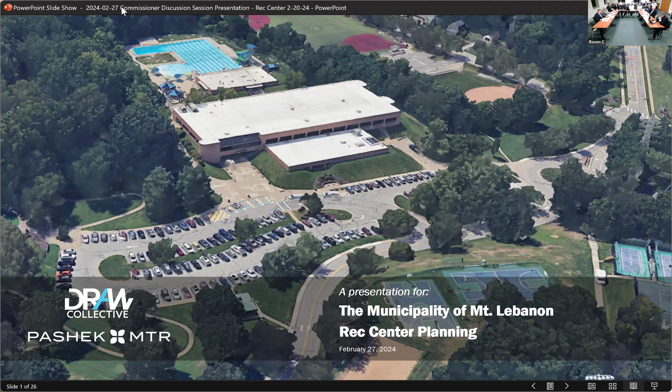So I think Ian kind of gave the overview. We want to go over the existing rec center building. We started by going through it, not a full assessment, but trying to understand what the needs were and what the challenges are at that building. We have a couple options for renovating the building, and an option for a new rec center in the park as one potential place to put it. Patrick will have additional information about what we can do on the site around that as we try to tie whatever we do with these buildings into the larger park. Okay, good.

So I'm sure we've all been to the existing rec center. When we pull up there, the building is very dark. It's hard to tell if the building is open. There is a lot of wayfinding confusion. But one of the largest problems with the rec center is that it's not accessible, so the pool is a challenge for folks to get to in the community.

As well as there are 2 entrances to this building: a hockey entrance on the lower level, and a separate entrance up the ramp to get to the second community level. But the building itself lacks any wayfinding. If you are a newbie coming to the rec center, it's hard to know really what level you should go to or where to drop your child off at summer, those sort of things.

So the first thing we did was meet with the staff and examine how the rec center currently functions and what improvements they would like to see in the facility. One of their biggest takeaways was that the building lacks storage. They could use additional locker and changing facilities for the hockey program, and there is a need for additional meeting rooms of different sizes.

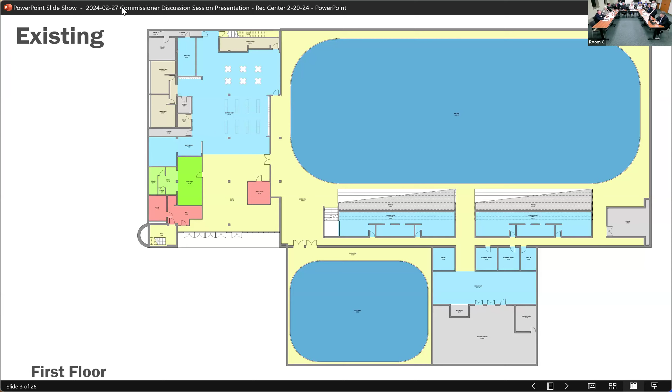And honestly, it wasn't on the original plans of the building. It must have been something they found out under construction and realized they needed. So anyway, it is there and it's something we need to work around.

So the first option - we'll show you two options. One is a smaller addition of an elevator and a stairwell to the exterior of the building. And then the second option is a larger addition to the front of the building.

So on this first plan here, you'll see the addition of the elevator and the communicating stairwell. We've also reconfigured some things internally to meet some of those staff wishes. You can see the areas in red - those are staff areas - and we've consolidated those on the first and second floor around that existing stairwell, so staff are able to move vertically throughout the building internally. The other idea is you can create more of a storefront for staff access, so as people buy membership passes or hockey facility access, you can really have just one point of check-in for folks.

We've moved the party room to the right so that participants can come in and off the ice very easily, and parents can watch their children as they're participating in parties. We've also added an additional changing locker room facility in the back, so with these additions we're just getting more toilets and showers. These could be used however - you could have them as swing restrooms, depending on the team makeup that day or who is using them. But those are just additional changing facilities for refs, or if it's a boy and girl team, that sort of thing.

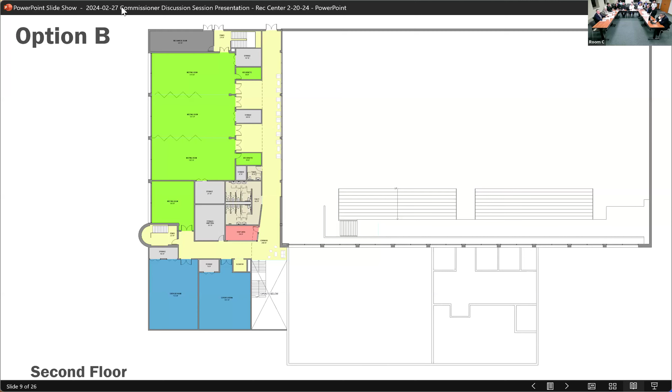Staff offices still daylit on the first floor? Yes, so you would still have windows in the front, and we can get some on the side of that building too. As you get farther around the side, you can't quite get as many, but we'd put more where we can, and get kind of some storage or back of house stuff in that area.

That's fine, I just hate — yeah, it'd be better than what they are now without windows, by far, I hate that. And there's a lot of opportunity here from when you see the glazing on the front for the daylight to carry in through the building.

So the rest of the areas can have more captured daylight throughout the facility. It'll be a brighter, lighter space. Is glazing a term? Oh, sorry — windows, windows, sorry.

Okay, so here you can start to see the space configuration in each option, based on how we've laid it out. If you decided to move forward on a certain option, we would definitely want to revisit these options as we get more into the construction documents. We'll be able to find additional areas for storage and electrical rooms, and those sorts of things will fall into place in that process, and these numbers will shift a lot. A lot of times we tighten up the floor plan a little bit on storage and we are able to get more user space.

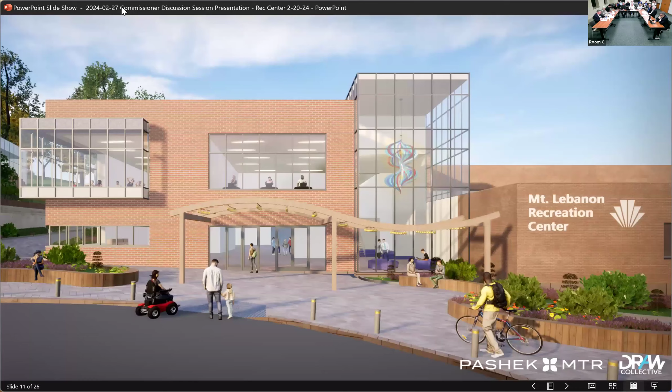This is a rendering of a concept of what that could look like. This is a version that would expand it out and pull it forward, with a large amount of glass on the right side for that public atrium with the stair going up to the upper floor. On the center and left windows, those would be the flex rooms where you could see activity going on, people doing whatever kind of events or exercise.

We'll see some options later that Patrick is looking at for the site, doing more out front of that building to activate that space, create better places to sit and wait for your ride or to hang out outside. You can see along that corner as you're coming around, we'd be working across that whole area to bring down the mound to more of a level area, so you can gain that space up against the building.

And windows, lots of glazing.

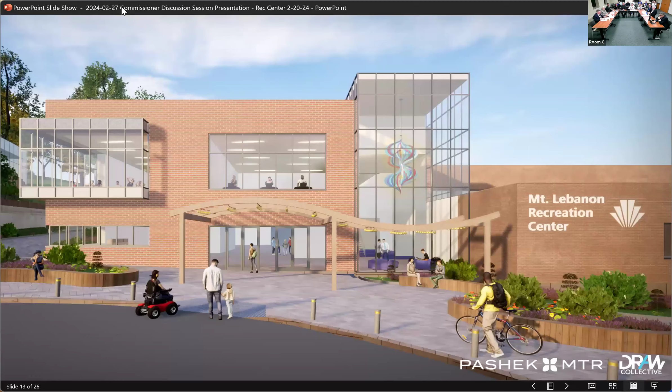Administration. I'm trying to figure out where the elevator is. So in this version, the elevator is farther back. In the version where we just do the elevator, that will be much more upfront because you're not adding building around it. The elevator is really in the same spot on both these schemes, it's just we've built the building out towards the parking lot.

We were looking at, in option B, if you had that elevator tower there, you could have an opportunity to put a large screen on it and project hockey games, or have rec center movie nights in that lobby. You could truly create a community space in that glassed-in tower with all that seating there. That's the elevator right there.

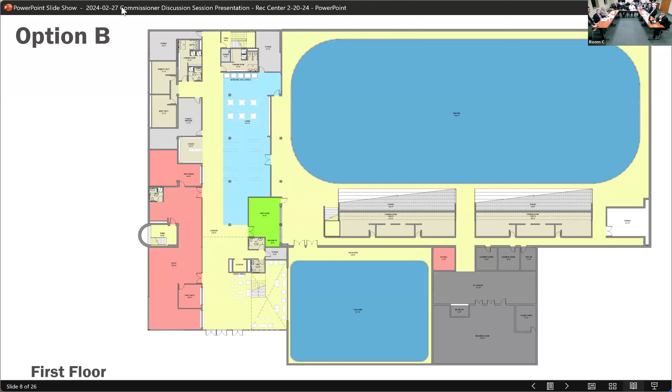So those are the two options we're focusing on tonight. We were also asked to dream big and look at a bigger option, go big. So we looked at an option where there aren't many places in all of Mount Lebanon where we could have a larger rec center space, and we're looking at the park here. So what if we put it in the park? This is an option that looks at it in the park.

Our initial thought and direction was to have it add onto the building in some way, and we looked at a lot of ways to do that. But it doesn't work to have this larger building connected to the existing building. If you look at the perimeter, almost two-thirds is right up against the rink, so there's really no way to connect into the existing building—you'd have to come across that, or get around the other side where there's service areas and the other rink. There's also not a good way to connect onto the existing community room side without closing in the few windows it could have there. So we ultimately land on this version that separates it out.

Knowing we have an issue with parking on the site, we looked at a version that would take the lowest level and create basically a parking garage on that floor. It's not a multi-floor garage—you just drive in at the same height as the parking lot, and that's the parking on that floor. It gains you about 30, maybe 32 spaces.

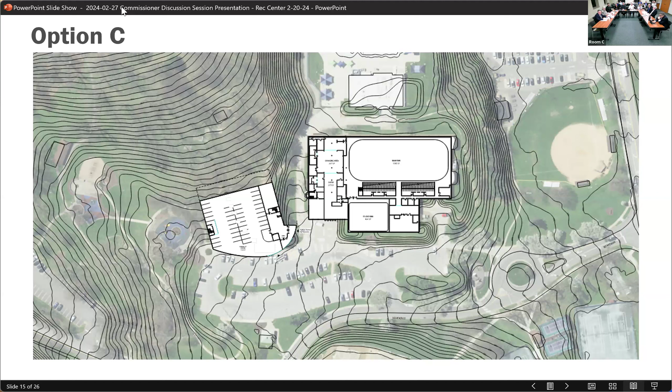And then the building would stack above that. There's a pretty sizable hill going up behind it. So this is a little closer plan: you'd go in, there'd be an entrance on the rec center side coming in on the right, a smaller lobby, and then you'd go up in an elevator or stairs to get to the main floors of the rec center.

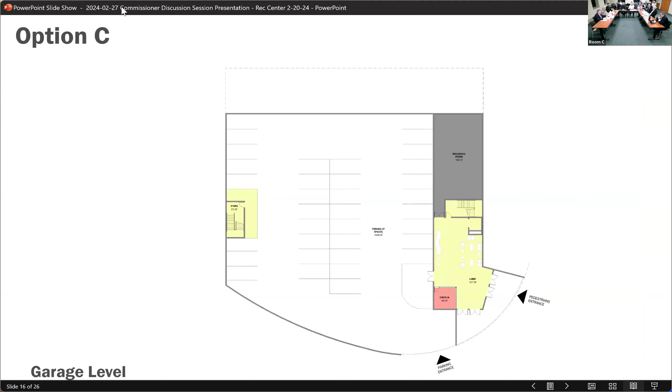So this would be the parking—you come in and park, go into that lobby, or just walk into that lobby from the current space out there. As you go up, one of the big spaces that was desired was essentially a basketball court, a large space where you could play pickleball and other things. This would be a large basketball court you could play cross-court on, so you can have additional games going on at the same time, including some of those rec league games.

In blue are all those recreation spaces. Around it, across the front, you can have your elliptical kind of things, cardio equipment, and other strength equipment. This is a space where there'd probably be more layers of programming to figure out exactly what goes in there, but it's enough space to give you that community-wide recreation facility.

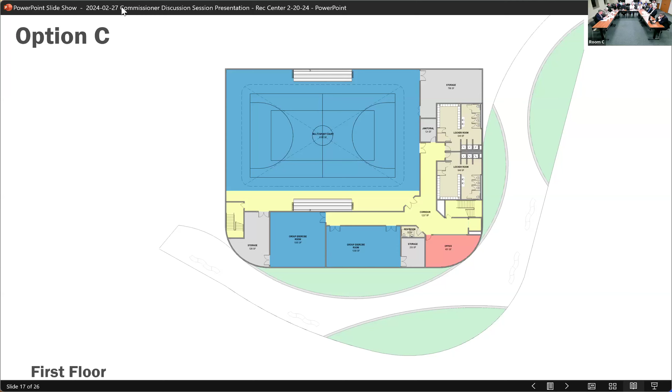We also looked at leaving the court open above. We'd have a track for walking or jogging up above that, and another level of open rec area on that floor, with a mix of ellipticals, treadmills, and open space for whatever you wanted to have there.

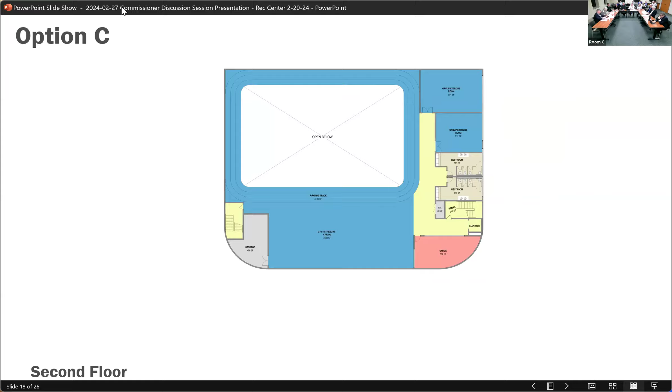So this is that view. That option could work with either option A or B, or some minor version of the existing rec building, since it's a separate building—it'd be a combination of how you wanted to put those two together.

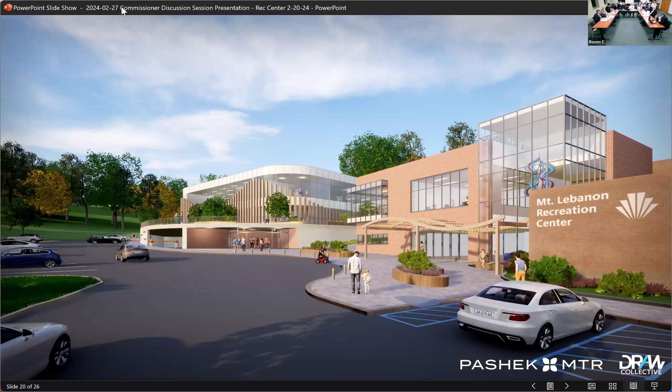So this is, again, that building—you can see a little bit of it off to the side. This is looking up towards it, so you can see where the pedestrian entrance is going in, straight in the middle. Off to the left is the vehicular entrance, and the building itself is up above with a lot of glass looking out onto the park.

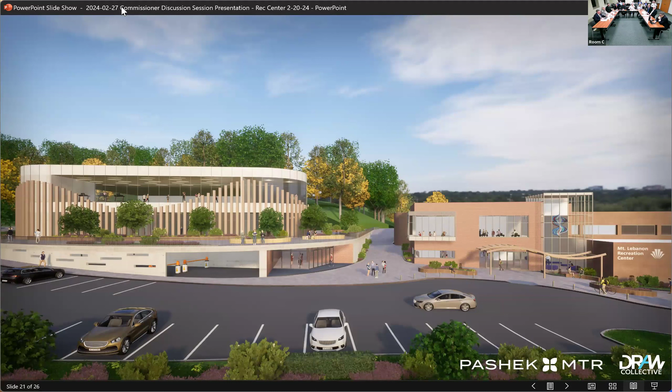This is a view looking straight on at the building. It's obviously a large building and would make a big impact on the park, but it puts it in a place that's centrally located in the community. We have an exterior plaza out front that ties the grade in. To the left, the parking lot rises, so you'd be at grade and could walk across the plaza to the swimming pool without having to come down in front of the recreation center and back up what is currently the driveway between the buildings.

That's a great point—I should have mentioned that. If you look on the left, around where the current playground is, at about that level, you could walk across the front of the building, which is the same level as the pool. So you can walk across, not going into the building, but around the front of it. That would be part of being on top of the garage.

So this should in theory be your total cost, and we gave you a range to try and cover it. Option A is in the 6.5 to 7 million range, and B is in that $10 million range. Then C is the big separate building, so that's a lot, 22.5 to almost 25. And then at the bottom you could do A plus C or B plus C.

And then what you had asked about is, what if we just want to do the elevator and plug that on the front? Looking at it the same way, the range would be like 1.7 to 1.9, so say 1.8. You'd have to redo some of the front to make that work, because you're kind of messing up where all the doors are, but as light a touch as possible, getting that elevator and stairway into the top and leaving that top floor in its current arrangement. So, 1.7 to 1.9.

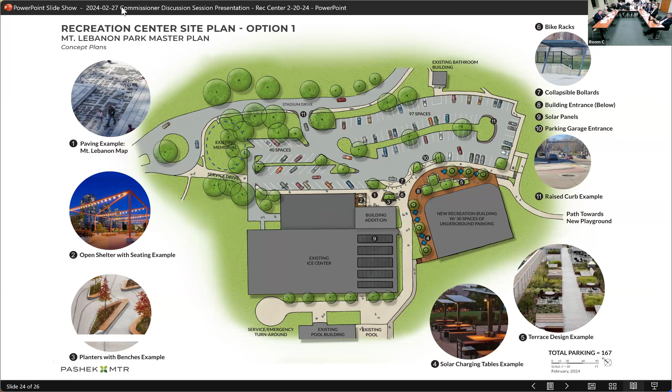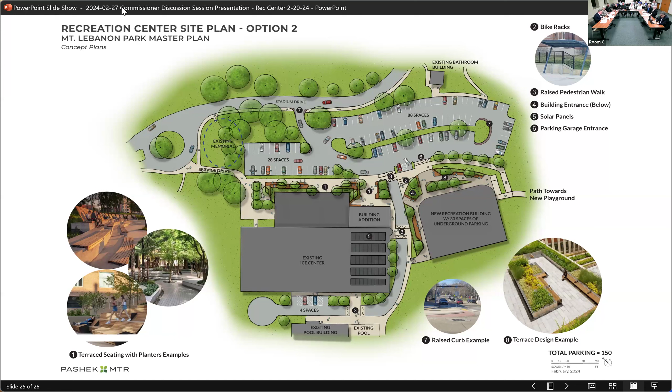And the terrace design would be similar to the plaza design with some seating and planters and things like that, in a more orthogonal way. So that is essentially option 2.

Option 3 is the most drastic change - the big overhaul to see what we could do to really improve this area. One of the primary things is relocating the entrance along Stadium Drive. It is currently about right here, so we're shifting it down and creating more of a central alley with a roundabout, making this the way that you look in and see the building. It makes it a more prominent entrance.

It also would decrease some of the space over here, and you can add more parking where that drive came from. And in this space, we would remove the mounds and add more spaces this way.

In this one, we also have the opportunity to move the playground, since this is a flat location and we've heard from the community that they want the playground close to all of the amenities - the bathrooms, the shelter, the rec space. It makes sense to move it down and be part of this flat space that was created in the parking. It also helps create this upper-lower connection, if this building were to be built, with the connection between the terrace and the playground.

And in this one, the designs of the plaza and the terrace from the pictures have a more curvilinear style. Again, these can all be intermixed and changed depending on what is desired and liked, and you can add the tables or things of that nature.

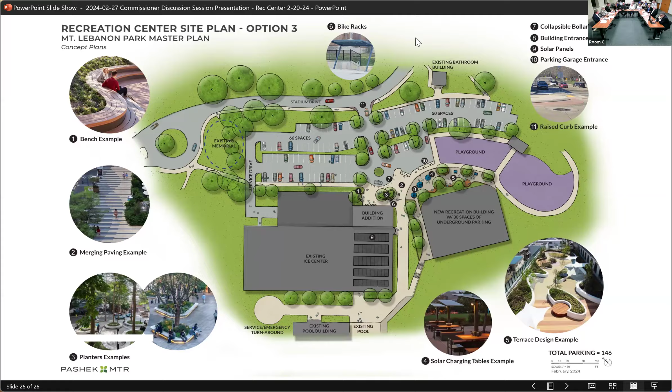So I mean, we should look at this as a total project, right? Right, yeah, we have more park stuff to look at probably. Yes, nice job, thank you.

And next, we have the fascinating, ever wonderful idea of roads.

All right, good evening. Tonight we're here, Rudy, myself, and Dan, to review the proposed 2024 road program. I trust everyone's received the recommendation report we sent out last week. The road program each year is one of the larger expenditures for the municipality, in both reconstruction, mill and overlay, as well as all the other maintenance programs involved.

So we thought it was worthwhile to go through these and make sure everyone's questions are addressed, and to run through the program step by step. Each year, the program starts with our StreetSaver software, where we have an inventory of all the roads within the municipality. As you can see from the screen, the 88 miles of roadway are broken into about 1,700 segments.

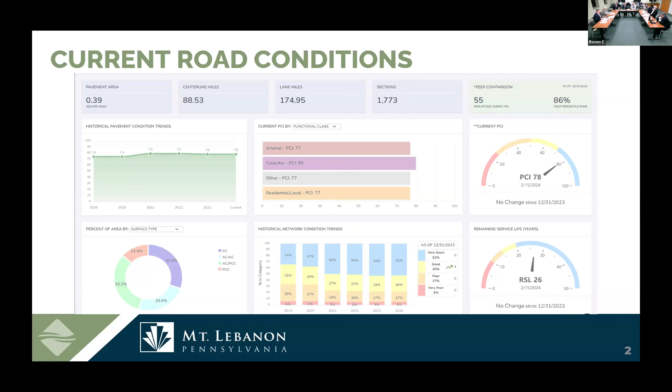So with that, as we highlight here, the current PCI is 78. The streets being considered for reconstruction in the base bid average about 53.8, and the ones in the alternate bid are about 50. The ones in the street maintenance program in the base bid are 64, and in the alternate bid about 57. So you can see the reconstruction streets are in that 50 range, while the mill and overlay streets are in that 60-ish range on average.

I thought it worthwhile to note on the right-hand side that over the last 5 years, we've had about 13 miles of road work done by utility companies in the form of mill and overlay. That 13 miles equates to 15% of the system done by utility companies. That's part of the reason for the bump we saw, Commissioner Silverman, where it bumped up over that 2020-and-so-on period, because there's been a lot of, I don't want to say free work, but a good contribution there.

Conversely, our own program, the mill and overlay and reconstruction, on a yearly basis really looks at about 2.5% of the system. So each year we're addressing about 2.5% of it.

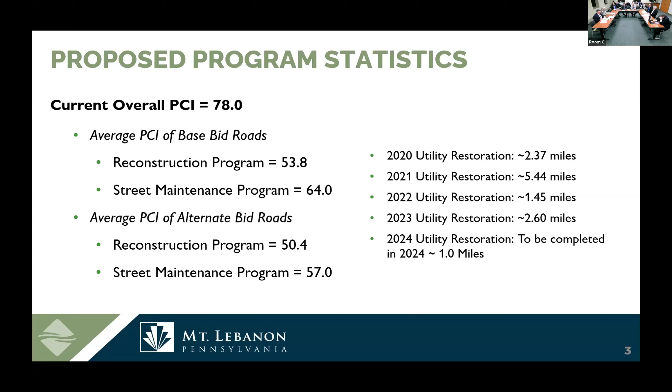Getting into the actual road reconstruction program, each year it starts with the StreetSaver, but it's not just done with a blind eye on that program. We take into consideration a number of other factors, as outlined on the screen: flooding issues, icing issues, and discussion with Public Works on problem areas that they do a lot of maintenance on, as well as utility coordination, which we'll highlight a few of today.

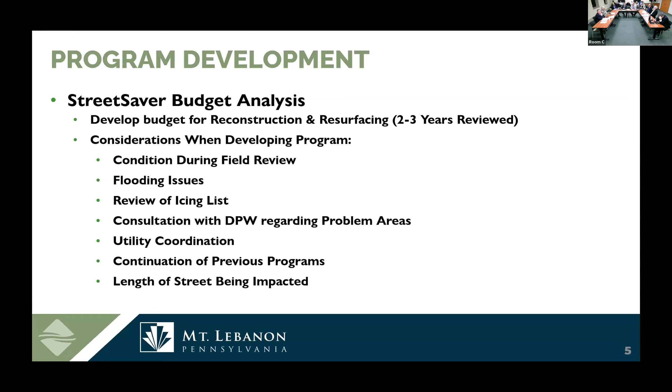Continuation of previous programs is also a factor, because a lot of times, looking at the length of street, we don't want to inconvenience residents. We've found that the sweet spot, or maximum, is about 1,000 feet to reconstruct. Beyond that, the inconvenience to residents walking to their homes becomes too cumbersome. So sometimes we do a smaller piece in year one, with the intent of doing the next piece in year two, just to avoid exceeding that 1,000 feet.

Moving forward, this year's program is looking at about 0.79 miles in the base bid and 0.33 miles in the alternate bid. The streets above the line, so to speak, there are 7 of them in the base bid, and they're in your packet as provided. There are 5 alternate bids being recommended.

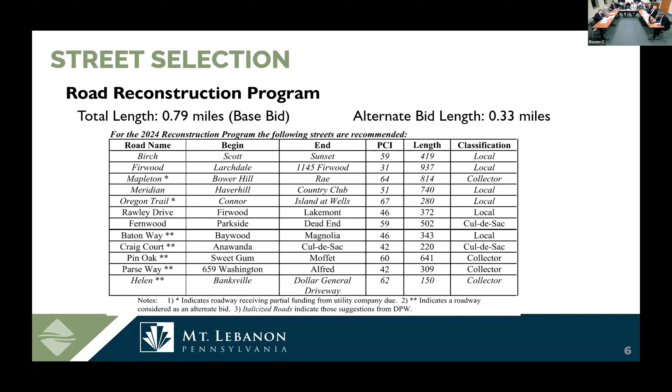A couple of items of note: two of the roadways, which we'll touch on in a second, Mapleton and Oregon Trail, have funding being provided by utility companies to help offset the cost of those streets. That was planned with the utility companies when they were doing their work. There are also a number of streets that we look at as continuations.

So getting into the individual streets — stop me if I'm going too fast — Birch Avenue, really from Scott to Sunset. This was a street that had a significant icing issue about a year ago, right, Rudy? The main issue of the icing has been corrected through some stormwater work, but we're looking to continue that repair further up the street just to make sure it doesn't propagate further on the roadway.

That being said, the length on this street was about 419 feet. I guess I forgot to mention the base bid streets for this year total about 4,064 feet, whereas last year's base bid streets totaled 4,055 feet, so it's nearly identical to the length of road we did in last year's program.

That's a pretty steep street for ice. It is, yeah, but it was pretty much isolated to the bottom. There was spring water coming out on the left-hand side, so we just extended a storm drain there. But we're also looking to collect other roof drains further up that roadway, so that it doesn't become an issue.

Because oftentimes what happens is when houses transfer over at the point of sale, there may have been a water issue in a basement that people just dealt with. But then when the new owners come in, they put in a sump pump and pump it out to the street, and now we have an icing issue.

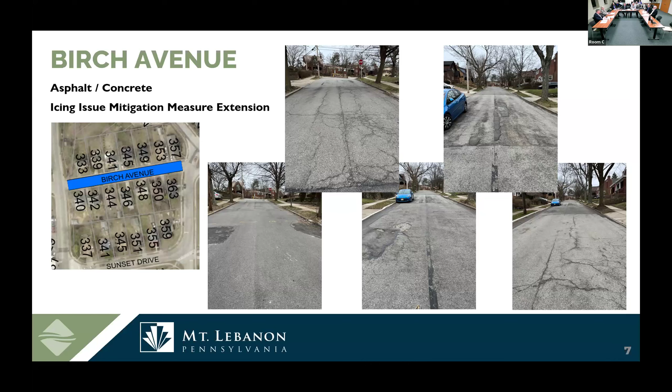The next street, Fernwood Avenue, from Parkside to the dead end. Once again, I don't necessarily need to go into detail on each street, but it's warranted. A lot of these streets, as you look on the recommendation report, the ones that are italicized also came up in the program and were recommended by Public Works from their maintenance efforts as well.

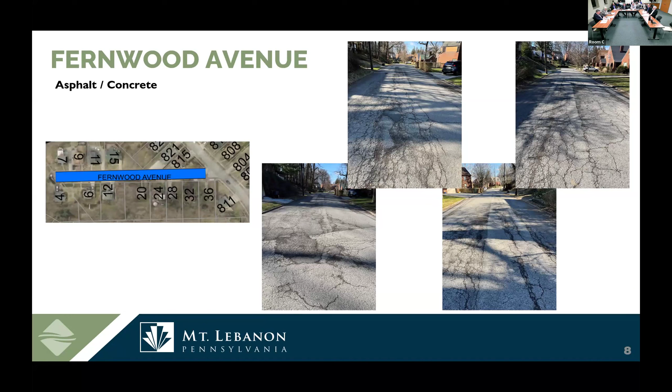That section is not in very bad shape. I think we actually reconstructed that. We'll probably resurface that at some point in time. Just curious, I don't really drive it, so I don't know. Yeah, it's in good shape.

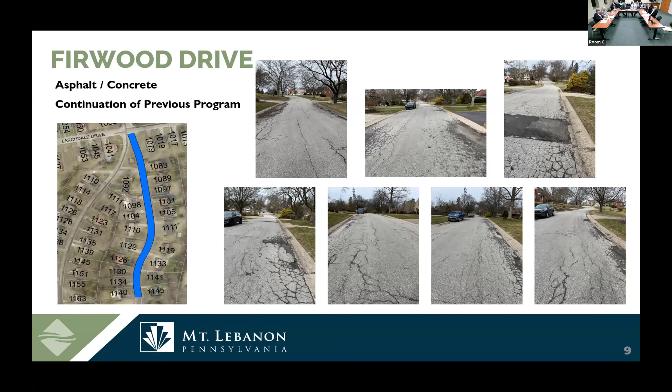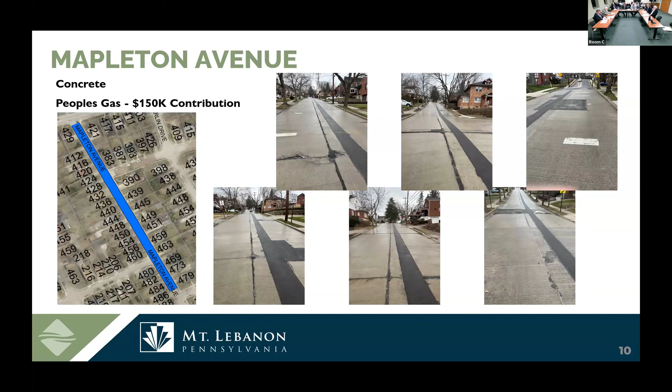Yeah, it makes sense. This is a concrete street, we're gonna replace it as concrete versus having to replace it as asphalt. Got it, yeah, and we do it at a discount since there's participation, so it's pre-negotiated. Smart.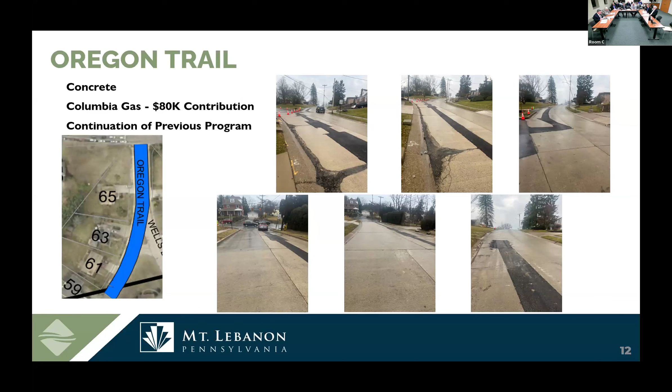This is Columbia Gas instead of Peoples, and there would be a contribution. We've estimated about 80,000 for that contribution as well. So that is in addition to our budget, those monies would be applied, and it would be a continuation of what we did last year adjacent to Wells Road.

Rawley, really from Furwood to Lakemont, and that really ends the base bid streets. That would account for just over 4,000 feet. Base bid streets—the next streets would be alternates.

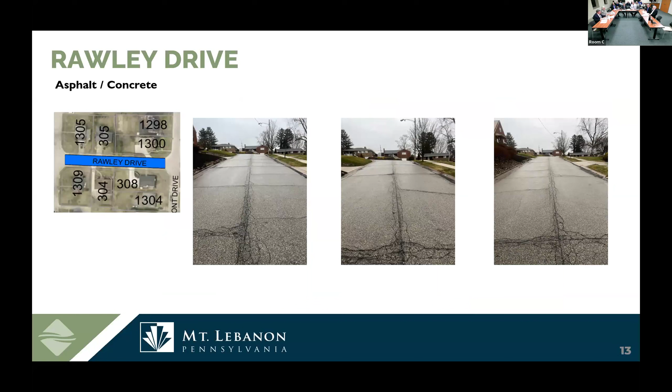Baton Way, it's an alley. We usually try to do, we've been picking off one alley more or less a year. Last year we did Summit Way, off of Cedar Boulevard. We've done a number of alleys over the years, trying to upgrade them, getting one here or there every year. So this would be a smaller one. We just recently did Magnolia, which this ties into on the upper side, so this would kind of tie into that program.

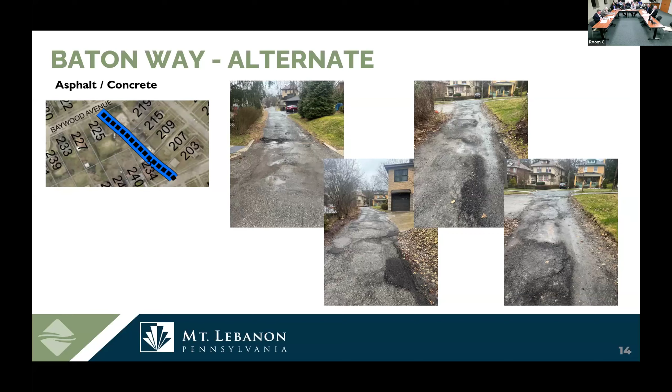Is it a brick? No, it's asphalt over concrete, that's what the records say. From the records we have, it shows that it was done in 1930 and nothing's been done with it since, so that might be why it's in the condition we see it. For almost 100 years, that's actually pretty good shape.

Craig Court, this is one that the commission saw as an alternate last year, so it was a brick street that was for consideration at that point, so it's kind of back for consideration again this year as an alternate, as long as we palletize the bricks and save them. We've bid that as an item, it's just the storage, I guess. I'm not sure how many will be salvaged from there because it's pretty bad.

It's been bad, broken up. Where you see that asphalt along the gutter line, we actually had to pull the bricks out because they were getting dangerous. We installed that by hand with our crews a couple years ago, so I went up and looked at it, pretty beat up, it's bad. But any that can be saved, please help.

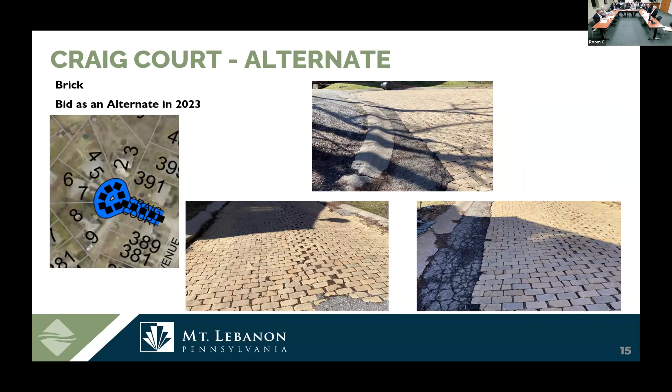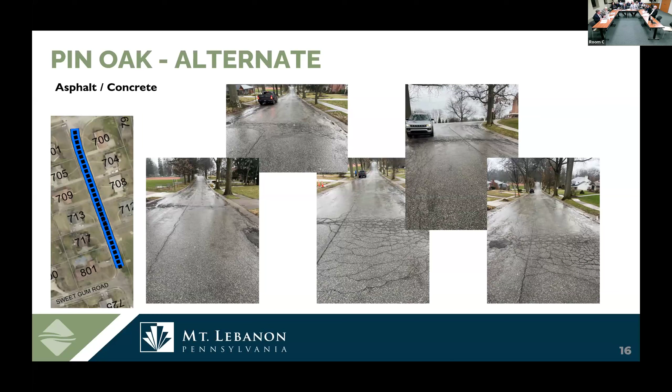Pin Oak Drive, this would be between Sweet Gum and Moffett. We completed Sweet Gum in 2016. We've done some other streets, Flint Ridge and others in Old Hickory in the area over the last few years. This is just continuing on in that neighborhood.

Parse Way, this would be picking up from Alfred to the parking garage. As you can see by the pictures, it's in pretty bad shape. The records here show 1985 was really the last time anything was done.

But it's an alternate, right? It's an alternate. I don't think this whole street was done in 1985 - it was a section that we did over by the crossing where the LRT site is, so we didn't do this part here. This has been longer. I was just thinking if when they do the second part of Vibrant Uptown, if they decide to do something with it.

I talked to Eric about that, and that's the thing - we're probably looking at a joint project with Port Authority, or whatever it's called now. Would that go back with PRT, would that go back into concrete? Probably not, we use asphalt pretty much for all of our plans.

I understand the one concern with all the dumpsters there, as far as I don't know if we would want to consider pads for the dumpsters, something along those lines. Let's cross that bridge when we get there, because there's some other ideas related to those dumpsters as well, so we want to incorporate that as well as anything that the business folks want to do up here at the same time.

We're done with it, this will at least give us a price. We'll have a number now to work with moving forward. Because I would imagine PRT would have some requirements in terms of weight of buses, right? Yeah, it would be built like a collector road, like one of our 12-inch profiles.

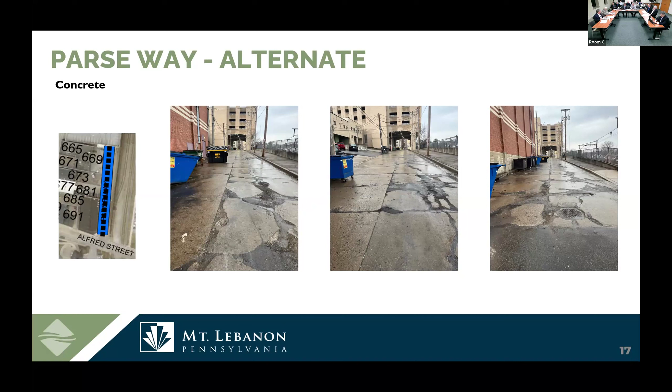Helen Drive, we've been working on Helen for a number of years and we have to do small pieces because there's so many intersecting streets with Helen. This one would really only be about 150 feet of street, just getting from Banksville up to halfway through the intersection with Dollar General, because we couldn't go all the way through their driveway. So it would be one of those ones we would have to do a piece and then another piece, just so that way we don't cut them off in the process.

Oh yeah. I assume, given just between Banksville going up, you just have to do half the road and the other half the road. You can't block it off completely, can you?

They can get around the other way, come out around the other side. We would just have Morrison, over around off of Foley and Morrison, torn up that way. The only difficulty would be the notifications, that way folks going to the business know to kind of look around from a detour perspective.

Because there's one organization on the bottom left - I think that, do they even have another way out of their driveway?

We would split that. We'd have them stop halfway at the driveway for access, so they'd still have in and out of their driveway. For the Dollar General, there's some sort of access road they can use, going back down to that little plaza, spots on the opposite side.

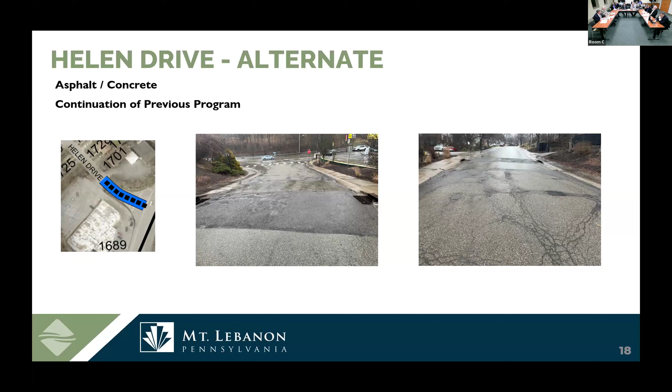We've worked on Helen in 2020 and 2021, so this is a continuation. All told, with the streets we have, the budget was 2.2 million as adopted by the commission. There's a stormwater supplement for any stormwater improvements we typically do year-to-year, that would be from the stormwater fund, and then a utility contribution of approximately 230,000.

So the base bid option is about 2.243 million. The alternate bid has another 850,000, which gives some latitude to pick and choose the streets once we get the bids in of how we want to move forward.

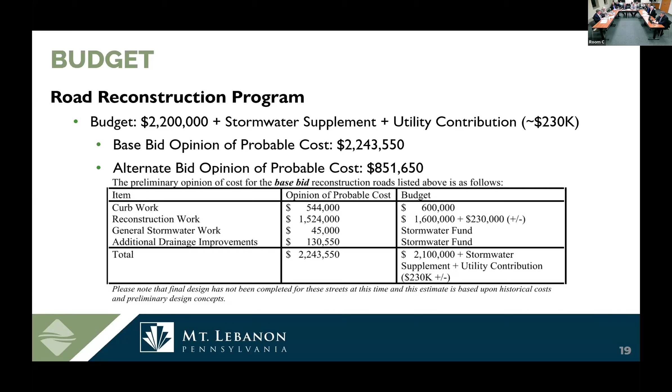One other item to note with the reconstruction program: last year we added as a change order to the reconstruction the Arden Road traffic calming. So we intend to bid the Cedar and Salem realignment, which Mike Haberman presented to the commission last year, incorporating it into the reconstruction contract since it's the same type of bid items. It would be its own bid so you can see that price independent of the other streets.

I threw a couple pictures on the screen - the upper is Arden Road where it hits Beverly before we did the realignment, and the bottom is after the realignment. That's just a Google Earth image so you can see that.

What about scrub grass, are we far enough along on that? No, we're not yet. They're only in phase one of the process.

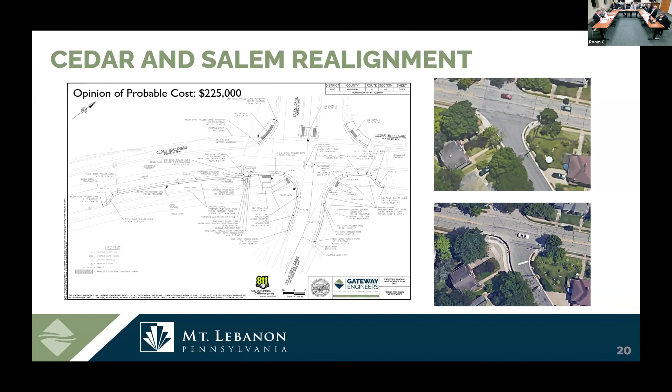So by including this in the bids, we'll not only have a price now, but I think we'll get a savings doing it as an independent project, so this makes sense. That ends what we would consider the reconstruction bid. At this point we'd move into the maintenance. Is there any questions on the reconstruction portion of what we presented?

So with that, the 2024 mill and overlay program - last year we did about 1.36 miles of road with an available budget of about 440,000. This year it's less, at 0.84 in the base bid. The main reason is we have some bigger streets proposed, wider, meaning Cedar Boulevard is much wider than a normal residential street, so we won't get as much length done with the same budget since a large portion of Cedar is being included.

This would be the time to narrow it and slow the traffic. As part of what we're proposing for Cedar Salem, we will neck that radius down as you come out of Hollycrest and move everybody over a little, narrowing it. You should see people tailgate me when I go down that at 25 miles. It's always like that block crosswalk idea. I know, raise those crosswalks.

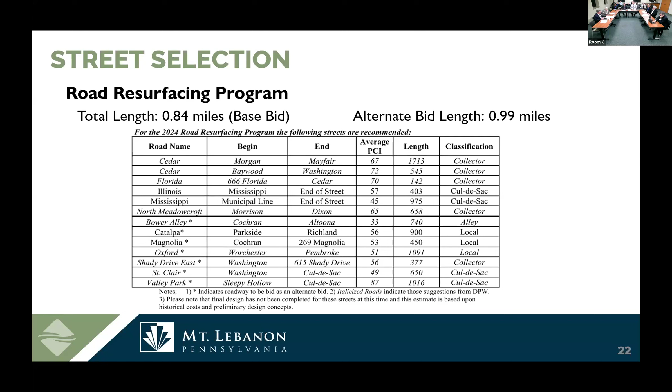So with that, Cedar Boulevard - we kind of talked about already - it would be picking up from where the utility company stopped their work at Mayfair, continuing that paving forward up to Morgan, creating a nice transition from where they stopped to getting up to Morgan Drive. We just found out they're going to replace the water line on that lower section too, down near Public Works, so that'll get repaved as well.

That section from Painter's Run or Gilkison up to Lennondale, right in front of the range, has had many breaks down there. If last year, we had originally planned to include that in our program, but right before we came to this meeting last year, they had alerted Rudy to doing that work, so that's why we held it off. It was a last minute thing.

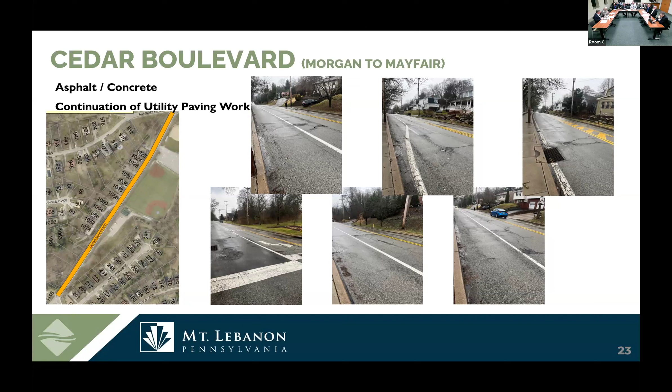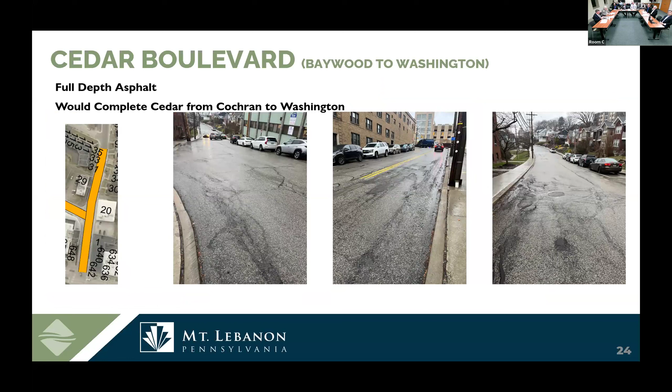Then the upper part of Cedar, this is Baywood to Washington. This is the last piece of the upper section of Cedar. Everything else has been done from Cochran except for this piece. So this would finish off that, as well as the little piece of Florida that ties into that, about a couple 100-foot section there. So that whole area would be done from Cedar all the way up to Washington and Florida, because we've already reconstructed that all the way back to Lebanon. That would finish both of those off.

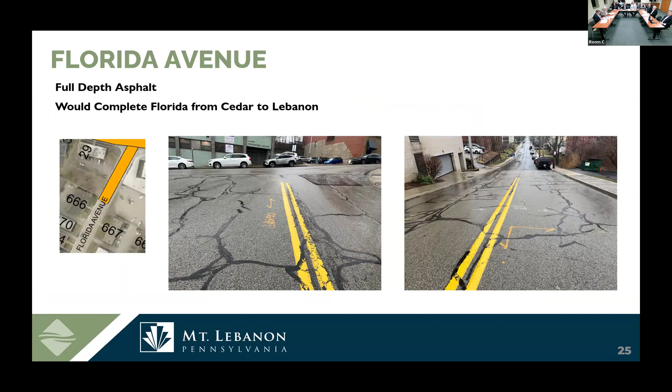Illinois and Mississippi, those are both kind of together. Neither have had work done since about 98, that's the record I have. So we're proposing to do mill and overlay on both, from the municipal line on Mississippi to the end, and then Illinois from the end of Mississippi. They kind of go hand in hand together. I've received calls from several of these residents over there too, over the last few years.

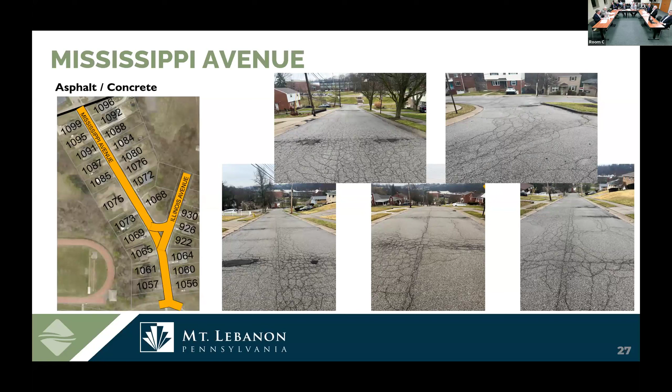And North Meadowcroft, if you recall, we did a section of North - it seems as this cycle comes around. About 20 years ago we had paved Beverly, North Meadowcroft, Cedar, and now they're all kind of coming back around 20 years later. That's where we're at. In fact, North Meadowcroft was exactly 20 years ago that we did this section.

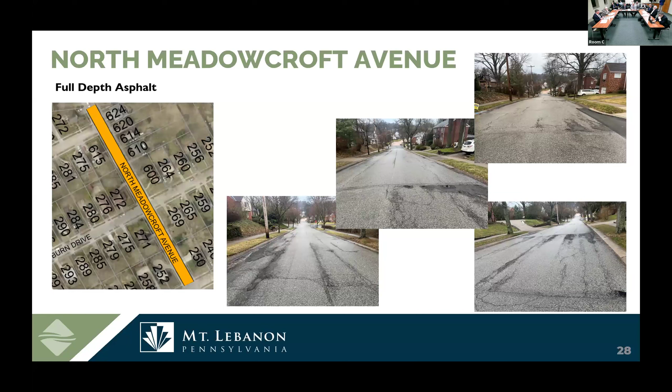Bower Alley is an alternate. This was on the bid last year as an alternate. It's a concrete street. We really can't shut it down with the apartment buildings there, so what we would propose is similar to what we did at Elleton, where we would mill, tape across the joints, and then pave over top of them.

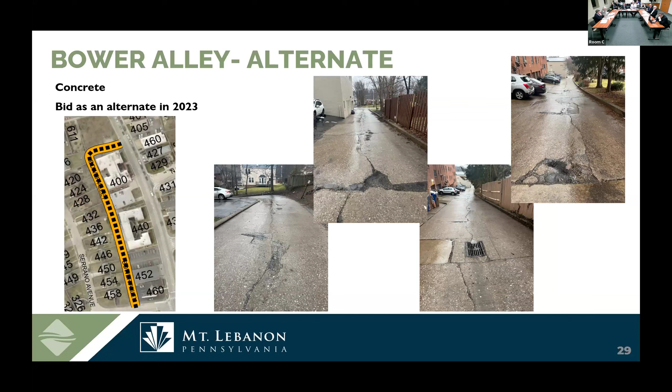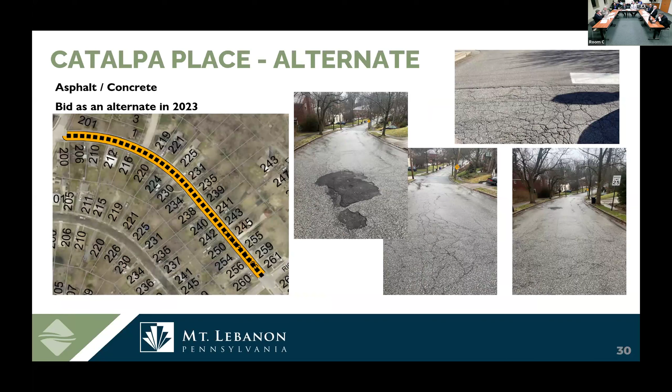We did the same thing back here too, at the municipal building, on the hillside rear entrance. Exactly. Catalpa, this was an alternate also last year, so we have that back in.

Magnolia Place is the same. Unfortunately, last year, the way the pricing came in, we weren't really able to exercise any of the alternates. So a lot of the alternates that you saw last year are kind of back in this year. The only reason we didn't move some of them into the base bid was the fact that Cedar Boulevard is a more heavily trafficked thoroughfare, and we can't let that degrade too far, so we wanted to move that ahead of some of these others. I think last year we pulled Crystal and Craig Court out of the base bid because they were brick and we hadn't finalized the Brick Street policy, and moved a couple other ones in.

Correct, yes. You would note at the bottom, your estimated cost of these to be 425,000. There's, in round numbers, 434,000 in the budget, so it doesn't seem terribly likely that any of these alternates we've...

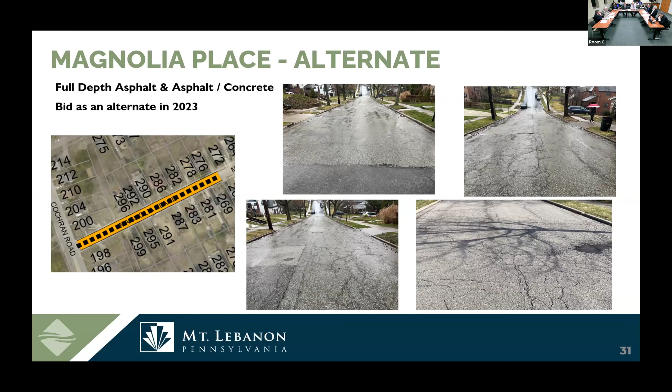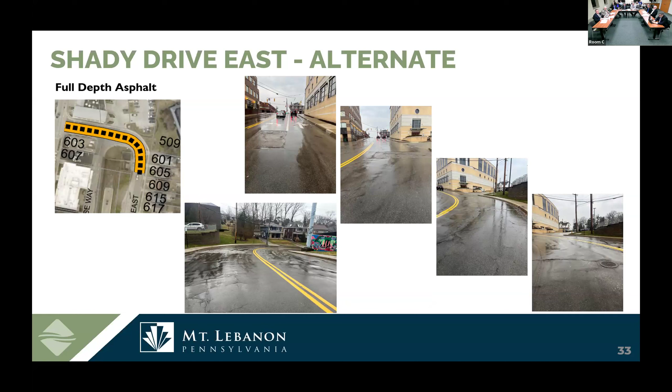So if I fast forward here a little bit, the Oxford alternate - Shady - we have by the public safety building on that bend, there's a lot of pushing and rutting in the paving there, and patches and whatnot. The rest of that was paved by the water company last year, from that point down, so we're just going to finish that little piece up Washington Road. Oxford was done two years ago, and that was the lower section.

St. Clair, so Valley Park - but getting to Commissioner Silverman's comment, on the budget side, yes, the budget is 433,770. Our base bid is at 425. We do have all these other alternates. The one thing I will say is that when I look at the asphalt index, and I'm not projecting the pricing to go down, last year's index was 594. This year's index, the same February of 2024, is 569. That's an indicator of what that asphalt price is going to be. So it has gone down 4%. I'm not predicting it going down 4%, but I'm hoping that maybe there's...

Other variables are always labor costs and fuel and oil costs. Understood, yeah.

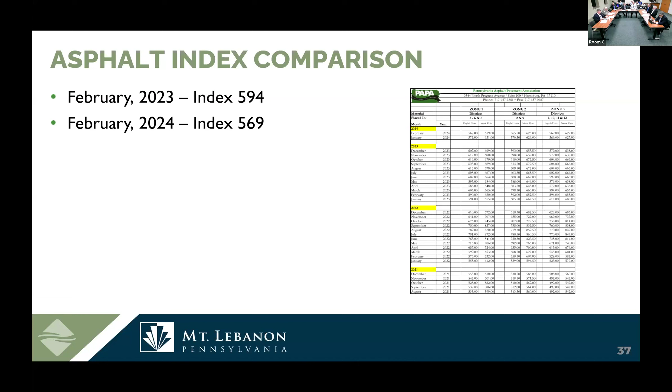So in a sense, as you start looking at the list, say only 2 can be done, which 2 streets would those be? On the alternate list, I think that's why we gave 7 alternates, because they're all different values. If you look at the screen, as far as what I anticipate the cost of them being, we do have a wide variety of choices.

If we have 30,000 available, if we're under bid or under budget by 30,000, we have a couple of choices to choose from. And then I think that would ultimately give the commission more optionality at that time. Okay, that's the intent.

Let's see what the bids come in. Go for it. Yeah. Right.

And then lastly, I wanted to touch on the Brick Street Maintenance Program. I know we took bids on that program a week or so ago. Public Works, and I have a list here on the screen. Public Works has, I italicized the category 1 and category 2 streets. Those are the streets that were in that PennDOT review a number of years ago, Castle Shannon Boulevard.

So the ones that are italicized are those that are 1 and 2. But all of these streets that are listed here are streets that Public Works has inventoried and has some level of repair that needs done on each of these. So these are all streets that are considered for repair.

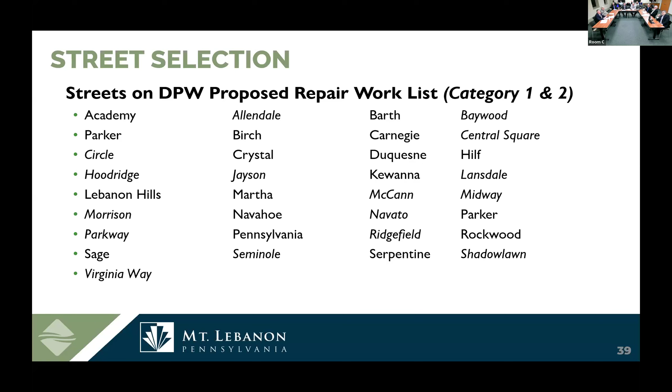So it's all just kind of, do you know offhand how much we have based on that? So we've got what was that, 940? 940 is what we marked this year. And then what's in not category 1 and 2, but needs work? I didn't break it down that far.

I mean, we could look. I mean, the 940 is total. That's the list that our folks went out and looked at. That's 1 through 4. All 4 categories, right?

And I'll throw out an idea, and I'm looking at your memo, and I don't know if you're gonna talk about this evening or not, where, for instance, the crack sealing program came in under bid or under budget.

The budget amount was 26,000, amount of the bid 17,800. Could we, or how would we achieve that to say, take the savings from that program and then cover that $5,500 difference for brick streets? That would go all to the maximum amount of that low bidder.

98,775, using the savings. We're getting at the end of budget, we're getting on the crack sealing program. Can we do it? How do we do it? Yes, you can. The process, do we even need to go through a budget amendment? Because the funds are there, it's just shifting them from one.

Okay, say that again, Stephen. Basically, the idea is if you look at this memo, the crack sealing program, the budget amount was round numbers 26,000. The bid came in 18,000, about 8,000 below. Well, we're over here by 5,500. So 8,000 of the good here, 5,500 of the bad there, they offset each other. We could get a bit more brick maintenance program done, up to the 98,775, and still stay within what we had budgeted for 2024.